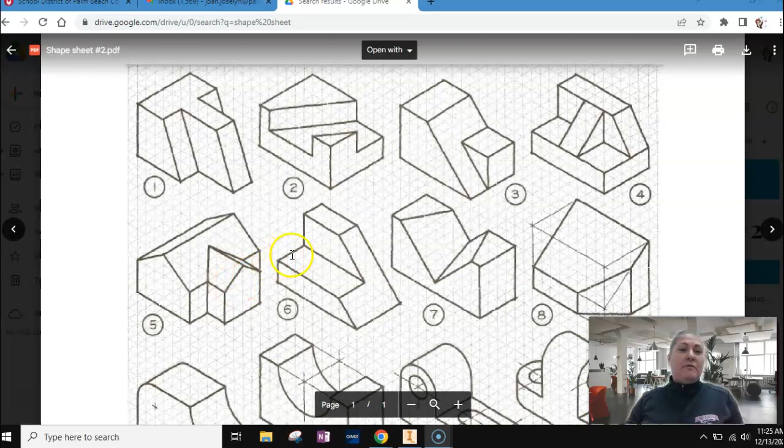This is Mrs. J, and today we are looking at Autodesk Inventor, shape sheet number 2, shape number 5. This shape sheet has a scale of 1/4 inch per box. So we're going to work on this one right here. I'm going to approach it by drawing this outside line, extruding it back, and then adding this side.

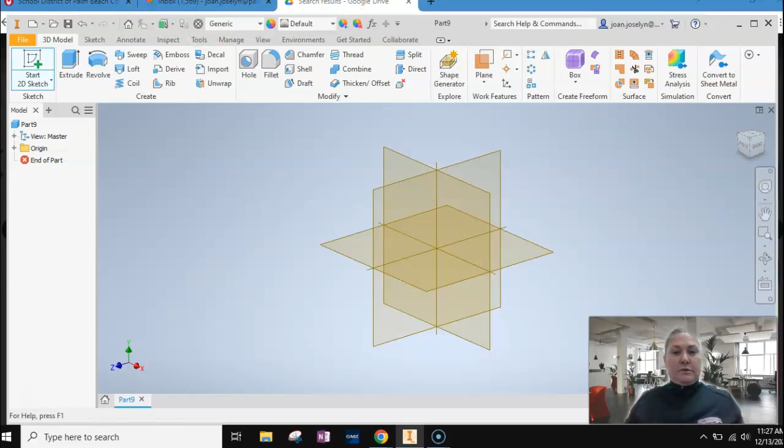Let's go to Inventor, and we're going to make sure that we're in a project folder for shape sheet 2. It's highlighted. We're going to make a new part and start our sketch. I think I will use the XY plane to start the side of that.

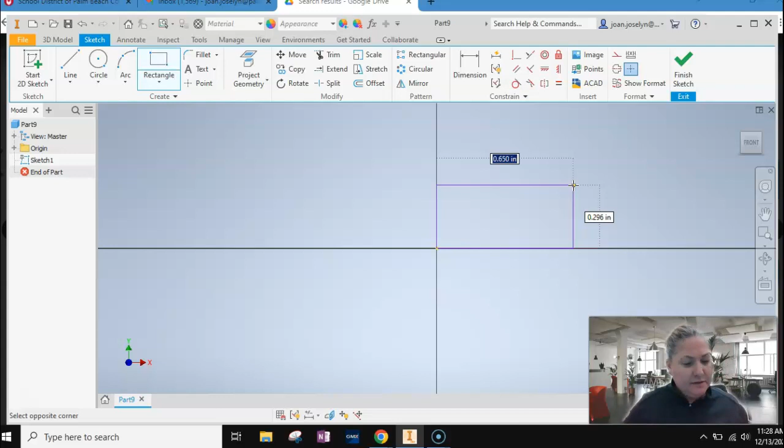Okay, let's use the rectangle tool. It'll be quick. Click on the origin, drag to the right. And we're going to make this 6 boxes by 3. So 6 asterisk 0.25, tab on my keyboard. Tab not working. Oh, it froze. All right, I'm going to hit enter just because my keyboard froze there.

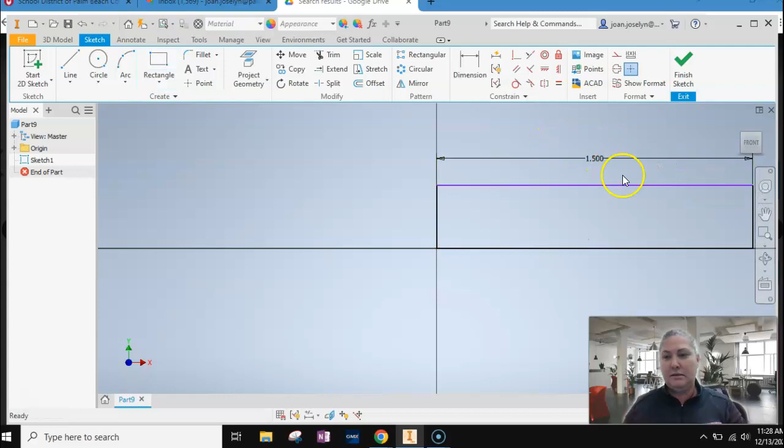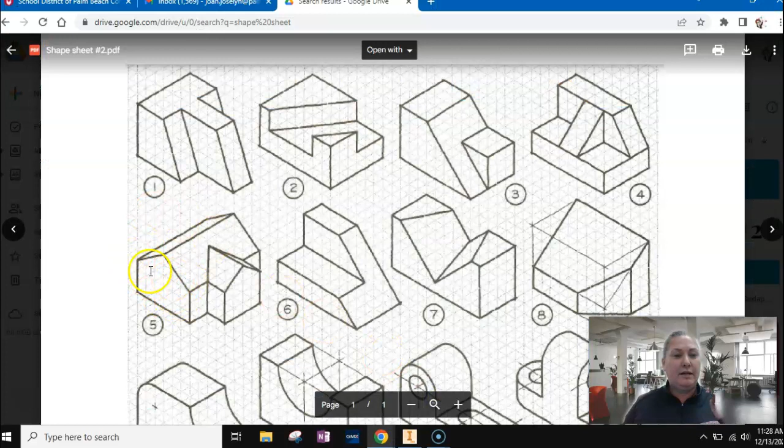Okay, so 1.5, I'm going to use the dimension tool over here. And this was 3 blocks, so 3 asterisk 0.25, enter. So 1.5 across the top, 0.75, and I'm doing this edge right here, so I kind of cut it off right here. So I'm making this rectangle.

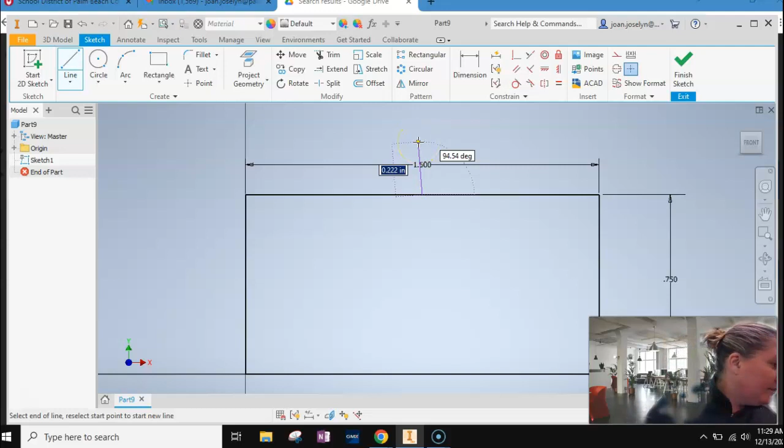Now I'm going to take the line tool and come right in the center here. So if you hover, you see a green dot if you're in the center. Get on the green dot and go straight up. That's going to be teeny tiny, hard to tell. 1, 2 boxes, so 0.5. Make sure you're at a 90-degree angle, 0.5.

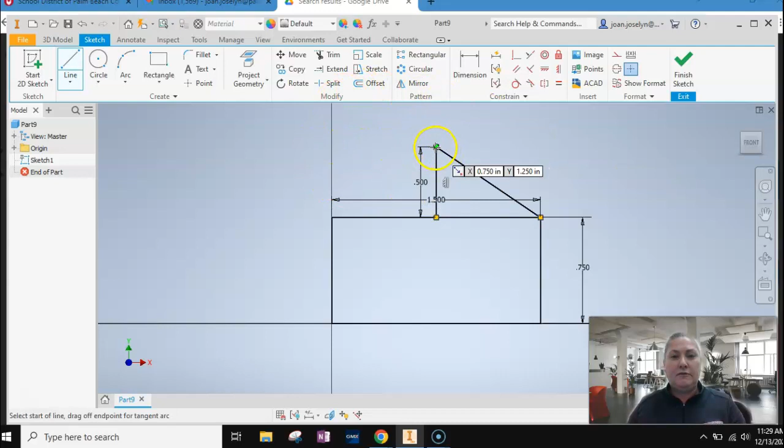And then since the line tool's already in there, just go to the right corner and left click it. Then you have the line tool still, you're going to click from the top to the bottom there. So you could delete all of this and clean it out, or I'm just going to extrude it and it'll still work. Hit escape. So I'm 1/2 inch up, 1.5 inches here, and 0.75 here. All right, finish my sketch. I'm going to hit the house button so it's a little smaller.

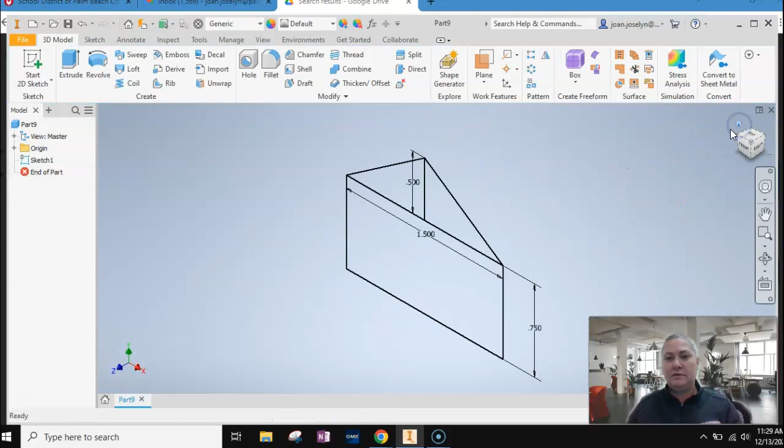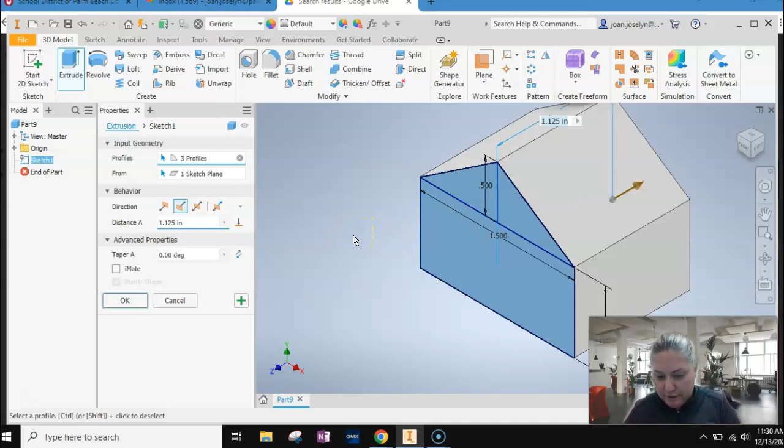Let's extrude. Because I cut these out, you're going to have to click them all when you extrude. I'm going to select the profiles, all 3 of them - this one, this one, this one. I'm going to drag it the other direction. It doesn't really matter, but it's just how I see it in the paper, so I want my brain to do the same way. And we're going to go back.

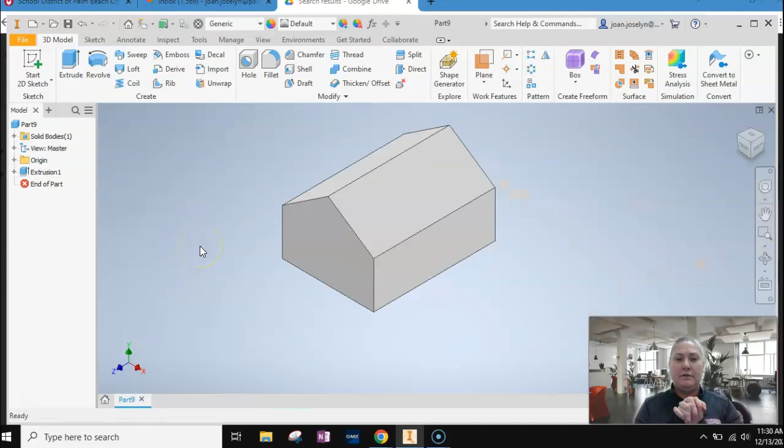Oh, I can't count that. 1, 2, 3, 4, 5, 6, 7, 8 boxes. 8 times 0.25, so my distance, 8 times 0.25, enter. There you go, so you got your little house. Pause it if you need to go back and get the measurements. That should have been like 2 inches, right? 8 times 1/4. Okay, so now we're just going to put the little face in the front here, and then we're going to extrude it.

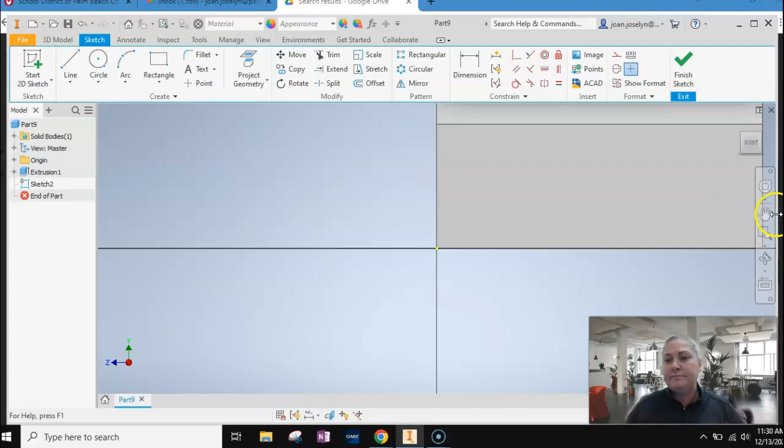Really easy, new sketch. Put it on this bottom face right here - I should say right side face, let's be proper. Use this tool to move it over. We're going to make a rectangle. Just make sure your rectangle hits that line and then comes down and hits the bottom line. You'll see it change color if you've hit it properly.

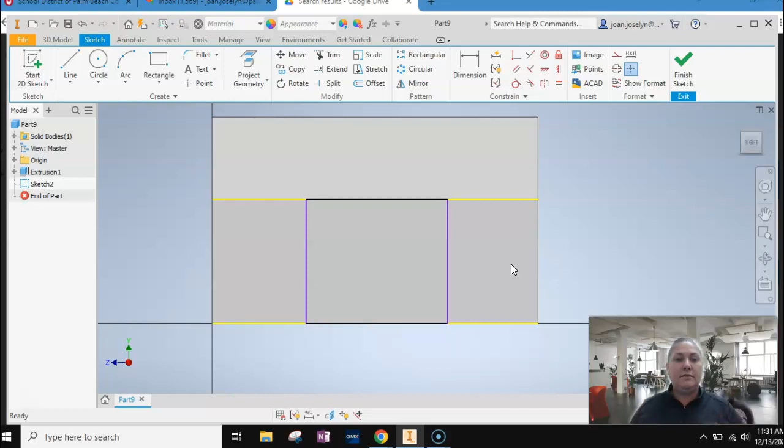I'm going to hit escape. See, I've got black here, purple, purple - that means that they've connected, they're exactly on there, we want that. And then we want to bring our line tool to get the front of that.

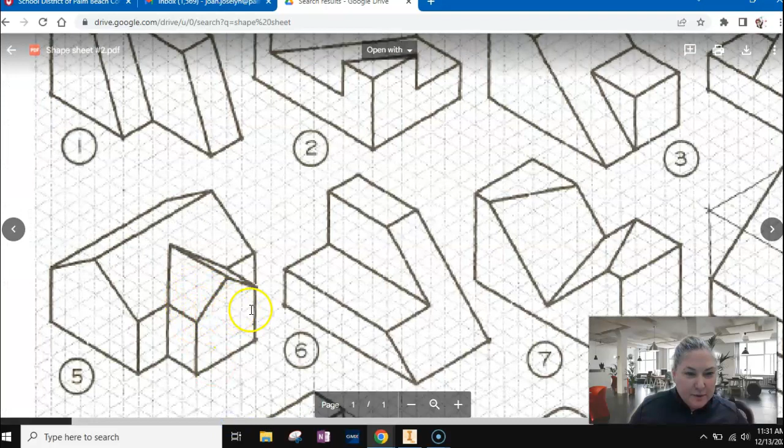It's only a little bit more than 1 box. That's hard to tell, that one. So talking about right here, it is, so I made this, right? So I got 1 box and then a little bit more. So let's just do the line tool, see how it looks.

Line tool, gonna go from this corner and get up to where you see the center. If you hover, you see how that dash comes up? That means you're in the center. So let's click that, and then let's click here. And then we'll just dimension it.

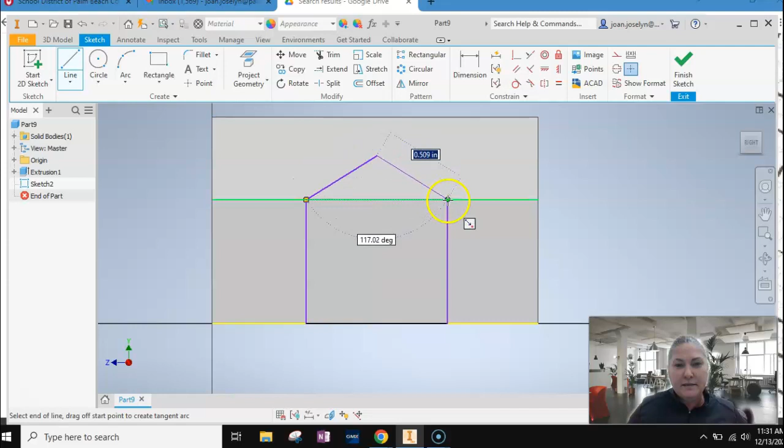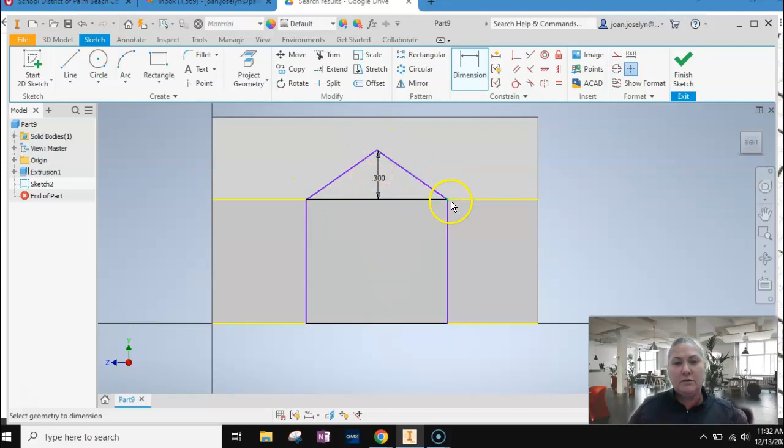Go to the dimension tool, go to that center that you just made, touch the top of that line you just made, and let's call it 0.3, because that looks kind of like the picture. Okay, so if you were careful there, you used the line tool, you made sure you got to the center of there, closed it up over here, and you dimensioned it 0.3 from here to here.

Finish your sketch, and now we're going to extrude. A little tricky, but it's actually not that bad. So we're going to choose two profiles - see profiles, this one and this one, this one on the top. Click both of them, and we want to come over here and click symmetric.

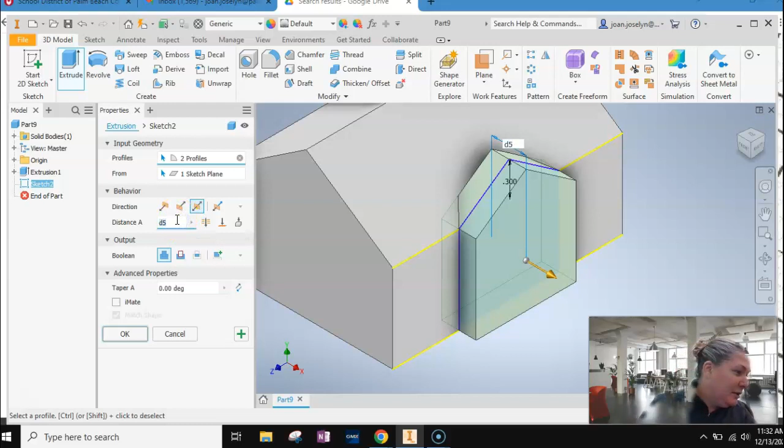Symmetric, asymmetric is probably more proper, but that's fine. I don't know why it says distance A, but I want it to be 2 boxes, 0.5. Does that look right? Yeah, 0.5. And I think if I click OK, I'm okay. Oh no, it didn't go all the way through. Look at that, first time I made it wrong.

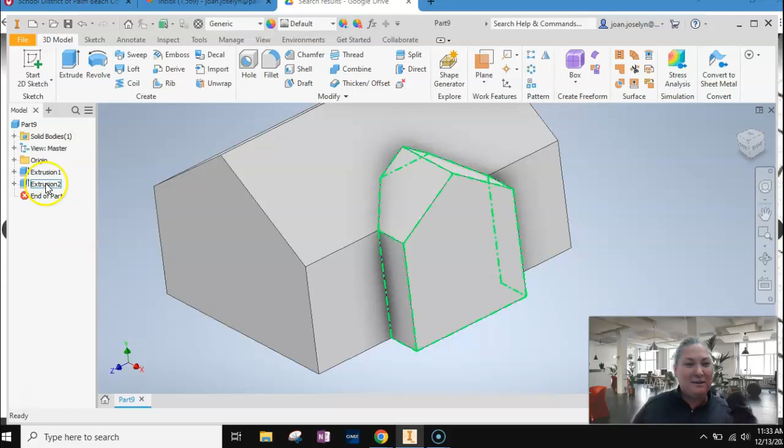Okay, sorry about that, so I'm just going to edit that. Extrusion 2, right click, edit the feature. So I guess it needed to be asymmetric. And then that second one, see this one in here? I just needed to pull it inside the object.

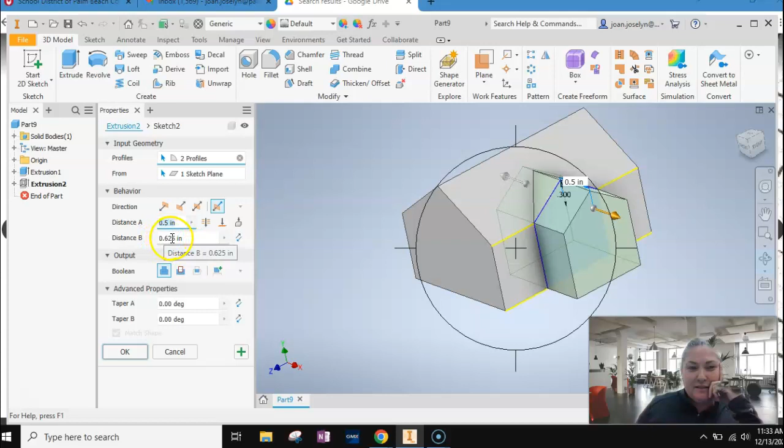As long as it's in there, it's joining and it's not going to cut, right? So it was 0.5 in the front, distance A was 0.5, and distance B is whatever, as long as you put it inside and it does not go all the way through. I should be on join and then press OK. And now it looks like it does in the picture. That's a fun one, a little Monopoly piece.